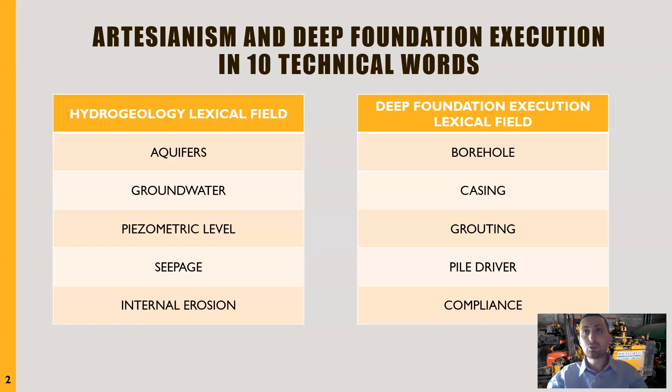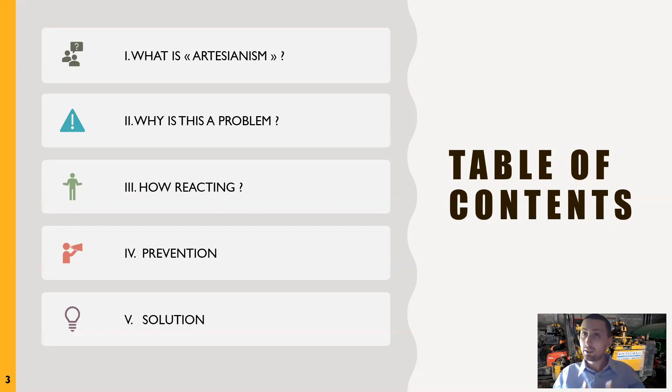My presentation will be in 5 parts. What is artesianism? Why is this a problem? How to react to this phenomenon correctly, and how to prevent this phenomenon from causing damages. And the solution we use on our construction sites.

In this drawing, we can see the piezometric level. You have 2 artesian wells. You have one artesian well at the same altitude as our piezometric level. So there is no water spouting. The pressure is equilibrated, so there is no water flow.

In the case of the spouting artesian well, we can see the borehole passes through an impermeable rock. So before the drilling, there was no water, but when you drill the impermeable rock and arrive in a confined aquifer under pressure, and if the surface is lower than the piezometric level, the equilibrium is not there, and so the water spouts from the artesian well.

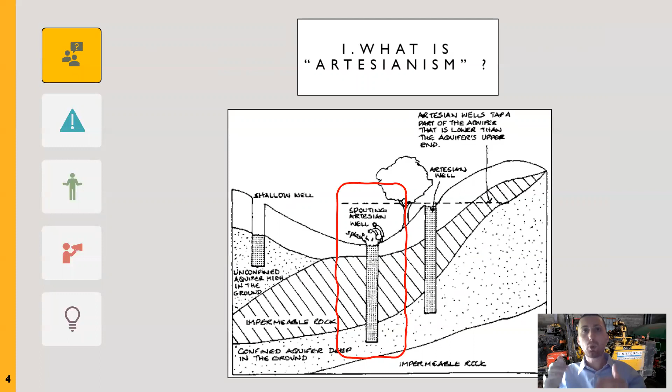In our case, in the execution of deep foundation, the water flow is a problem inside the borehole because we put concrete or cement grouting inside the borehole. Cement is soluble and can be brought out of the borehole by the water flow. So in the concrete, for example, you can have a loss of 30% of the mass of cement. That will cause a low resistance of the foundation after hardening.

There is another problem. The water flow is higher at the limit of the surface of the borehole. So that will bring back some little particles of the soil too, causing a low adhesion of the foundation. That's particularly bad for a foundation like a micropile.

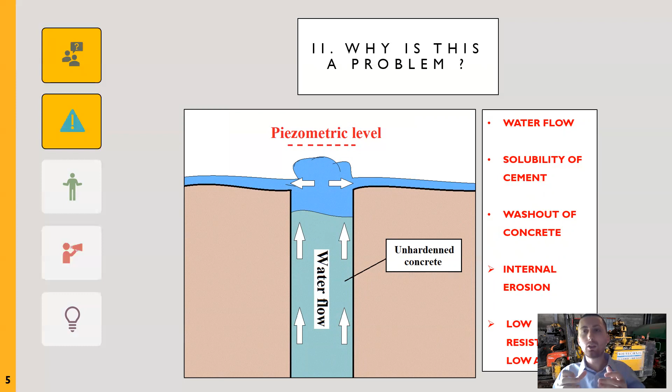If you are on a construction site and see your operators drill a borehole, and after you have water spouting from this borehole, you have to interrupt all your drilling because you have high probabilities to have another spouting artesian well if you drill another borehole near the actual spouting artesian well.

You have to retrieve the polluted waters if you have grouted this borehole before it spouts water. And you have to report to your manager the non-compliance of the foundation and organize with him a reparation.

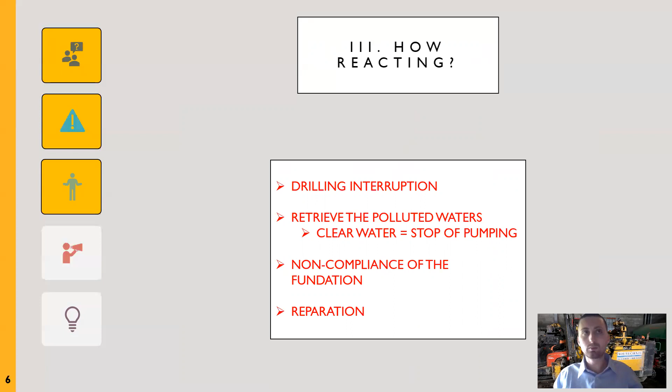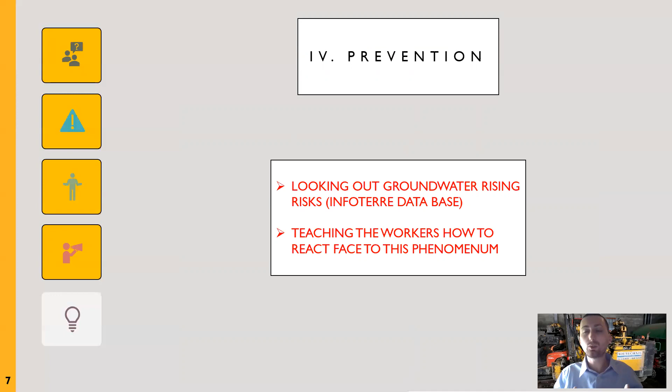For preventing this phenomenon from happening, you have to look out for groundwater rising risk on the Infoterre database to maybe recommend another mode of foundation or another mode of drilling, to provide some specialized equipment, and you have to teach the workers how to face this phenomenon fast with a solution easy to do for them.

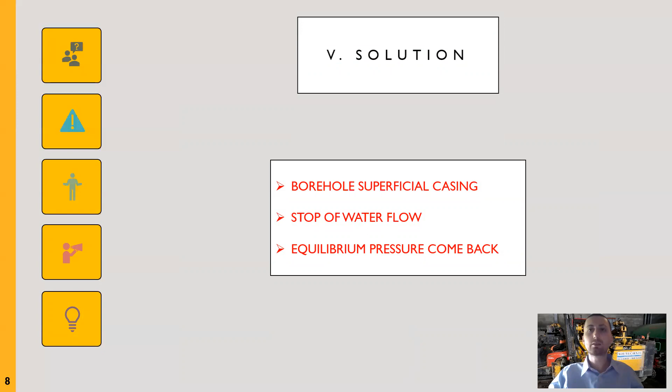If there is no water flow, there is no washout of the concrete. And so the concrete can harden without losing its mass. When it begins to harden a little, you can retrieve the casing and let the concrete harden more. Because after hardening a little, it will act like a stopper of water flow.